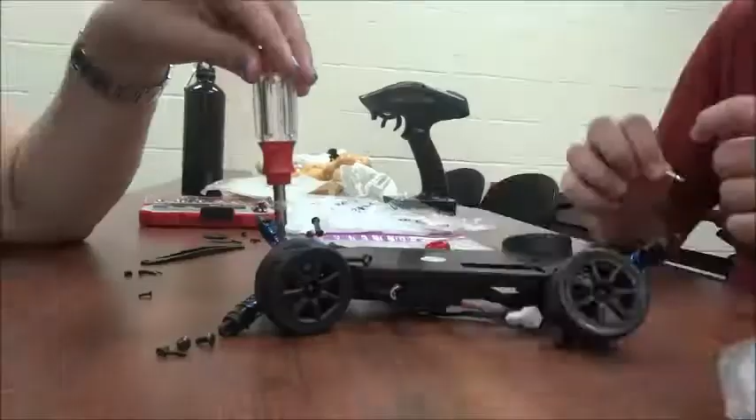In this video, the final result will be shown, and the group will show the final design. Also, 5 questions will be answered.

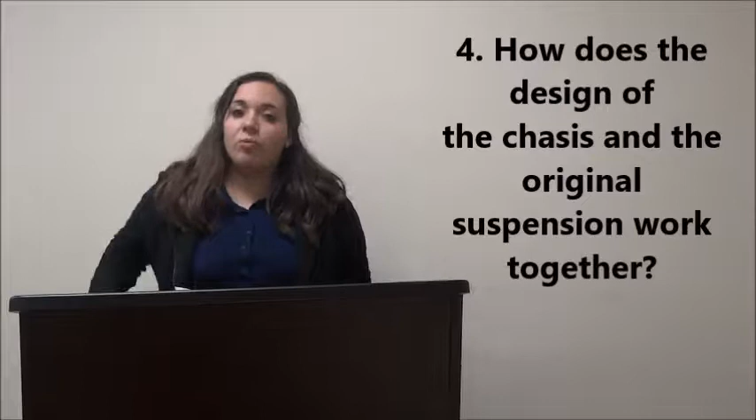Question 1: Why is the design like that? 2: What are the different components and how do they work together? 3: What is the purpose of having the chassis so close to the ground? 4: How do the design of the chassis and the original suspension work together? And 5: What issues did the group face in the design process of the car?

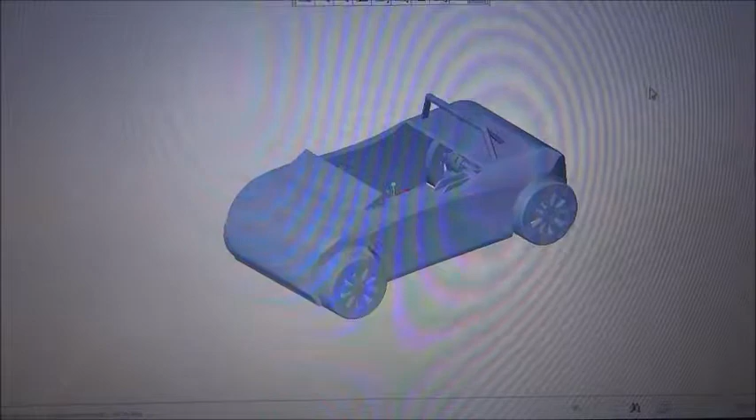To answer question number 1, we're going to use Pro Engineer. In this case, what we're going to have is our principal or outside design of the car. The main thing is to remove the old outside design, or what we know as the chassis, and create our own.

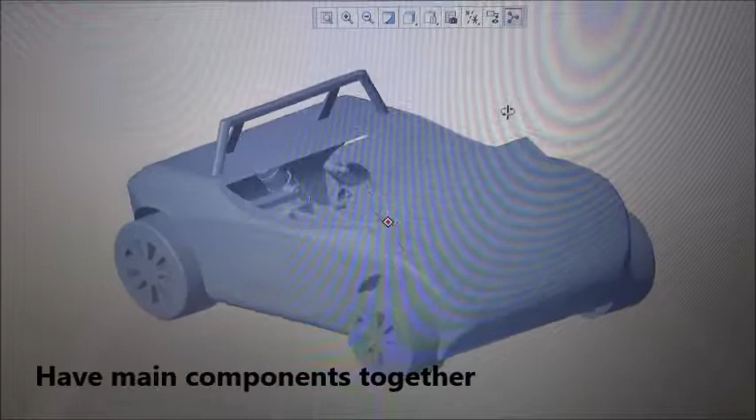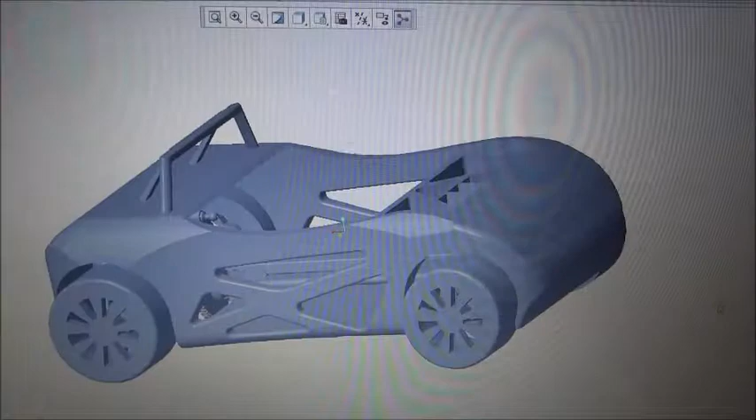Our first reason is to assemble all the main components into the car. We designed it with no ceiling so we could more easily assemble the top chassis, the traction, the suspension, and all of that. The holes make the car more dynamic, smooth, and give it a modern look. They also help make it lighter while still having the necessary support.

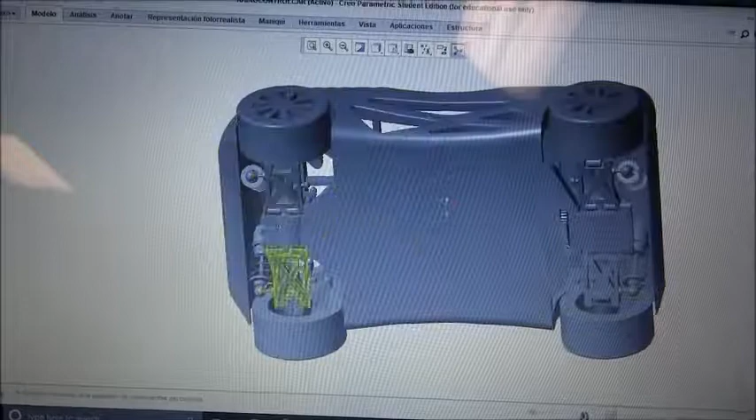So the main thing we did is add these components to the main design of the car, which give support to all the main components of the traction, rear and front. We also added the suspension in another part, which is supported by the chassis itself in both front and rear traction.

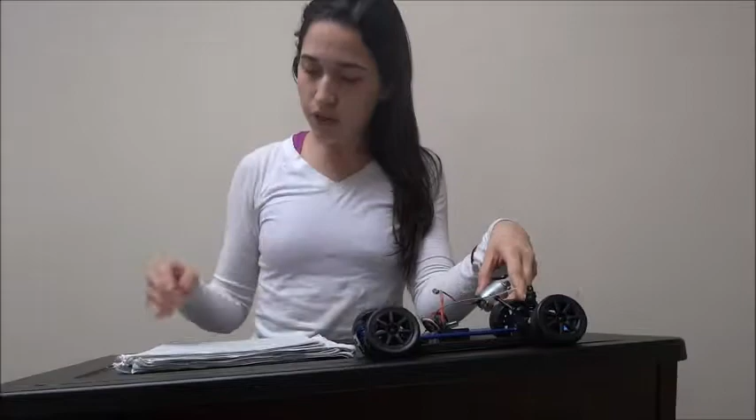To answer question number 2: the transmitter sends a control signal to the receiver using radio waves, which then drives the motor, causing a specific action to occur. The motor in the car causes the wheels to turn, converting electricity into motion to move the wheels.

The outer casing keeps all the components in one piece. The inner casing protects small components. The batteries supply power to the radio control car. The front lever, wheels, and axle allow the car to turn and keep moving. The rear wheels and axle allow the car to move forward and backward. The springs act as shock absorbers.

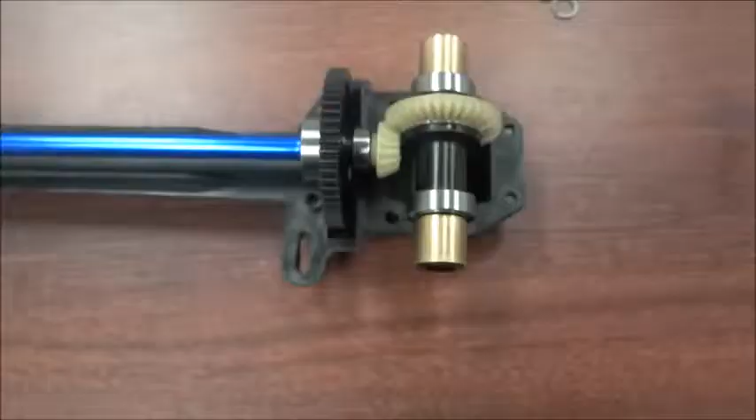To answer this question, having the chassis close to the ground adds to the aerodynamics of the car. When cars travel at high speeds, they need to be extremely stable. A low ride height attributes to a low center of gravity, which leads to better handling, allowing the car to take sharp turns at high speed without flipping over.

When the chassis is closer to the ground, less air passes under the car while driving, which further keeps the car sticking to the ground.

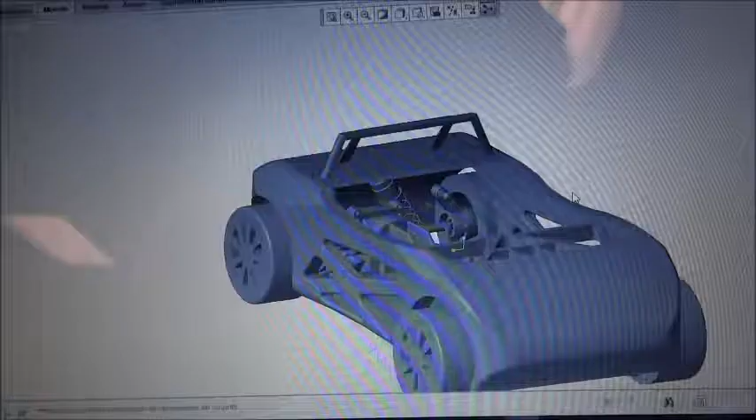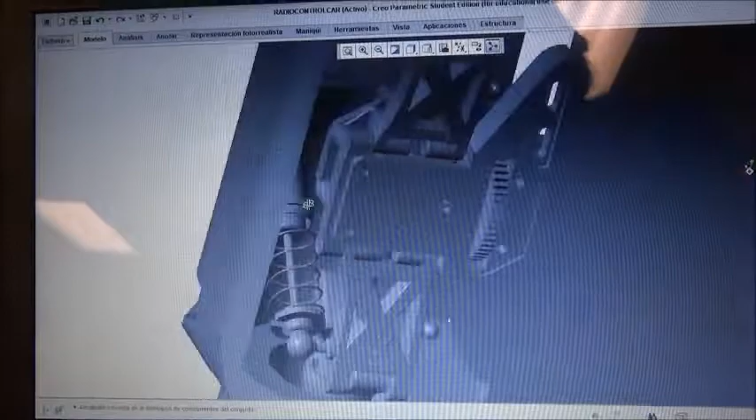The first thing we need to know is that once we add the outside design or chassis, several parts don't take their place correctly. For example, we can see the suspension itself isn't touching what it should be touching. So what we did was change the position of the suspension, since some components needed to take other places.

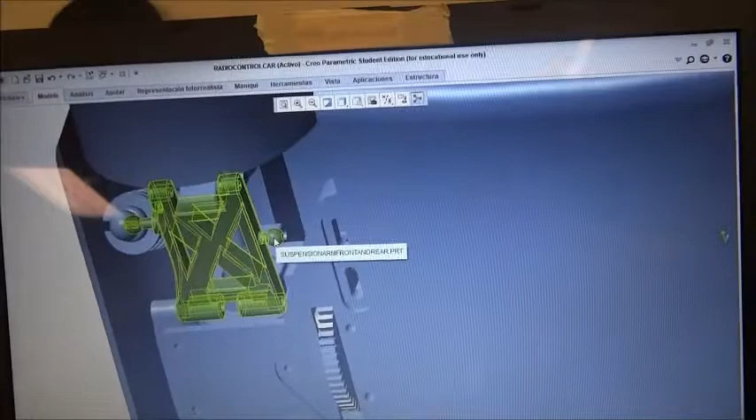In this case, we already assembled the main design of the car with an additional fit, which supports all the main components of the suspension on the front and rear traction.

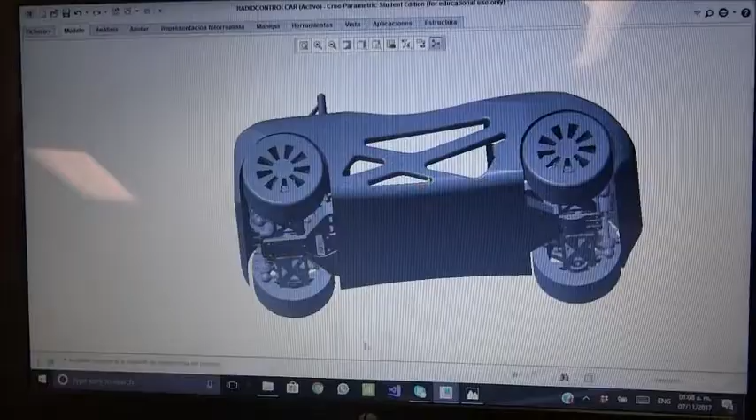To answer the last question, there are 3 different issues we faced on this project. First is the pieces: some of the pieces are really tiny, so when we wanted to put the original suspension back together, we had to be extremely careful, because one of the most difficult parts was accurately fitting all of the parts together in the right place.

Second, measurement: we had to be careful when measuring the pieces because they can easily be deformed with the caliper, which made the assembly process really difficult at times.

And finally, the design: as a team project, we had a lot of different ideas about how to build a better radio control car and the best way to do that. But finally, we combined all our ideas into the Cesaretti radio control car.